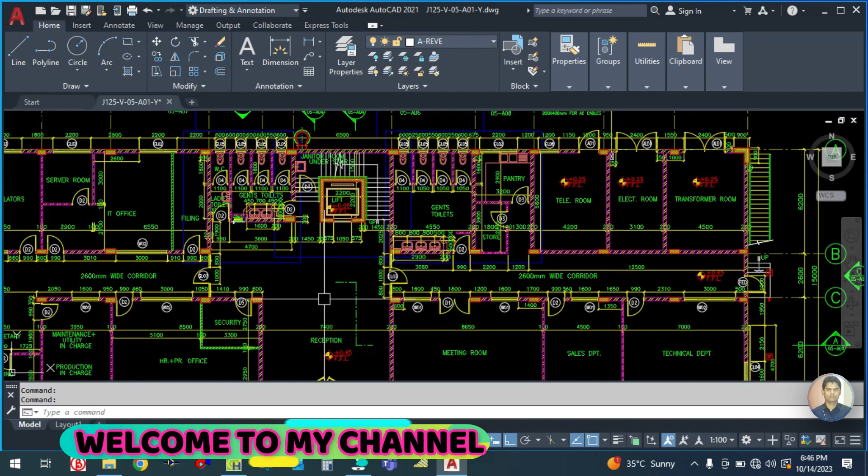So now we are going to start the table split system for ground floor. As you can see here, we have created until this planning and translator as well as toilet. So we are going to continue the remaining spaces here: corridor, then telecom room, electrical room, and pantry, storage, gents toilets. So from one system we have to give in all the spaces. So let us start now.

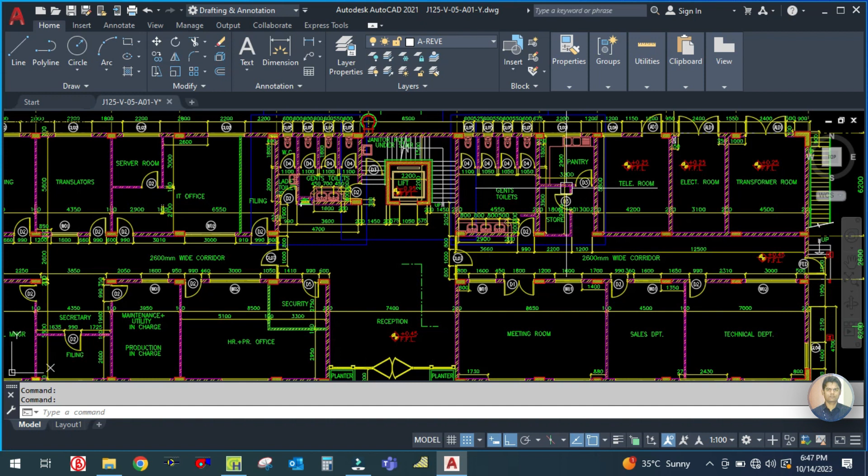Let me create one more system here, which is ground floor corridor. Okay, so we have to create two systems. One is for the corridor and one is for these spaces. So let us start now. Let me create here a system for the corridor. Let me duplicate this. Okay, then

let me check which one is the last space. Here is the split unit 9. So let us duplicate this split unit 9, and just rename this. Here you can see this is the air system properties. So there are four tabs here. First one is the general tab.

Second one is DOAS, dedicated outdoor air system component. This will be applicable for the package unit, that's why this is hidden. And third one is zone component. In the zone component we have to add the spaces into the zone, and fourth one is sizing data. So let us see one by one.

So go to the general tab, and the first one in the general tab is air system name. So let us duplicate this air system name. Make it corridor. Okay, so this is caps lock. Corridor ground floor split unit 10. Okay, and next is equipment type. In the equipment type you have to select the terminal unit, because terminal unit comes under a split unit.

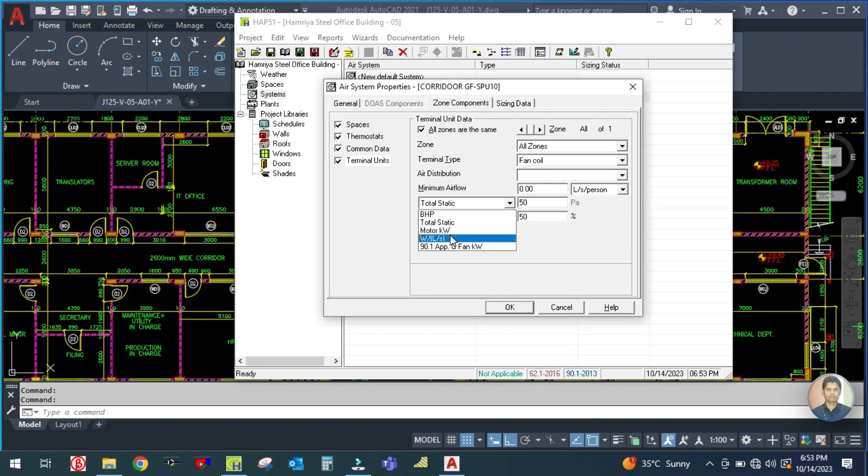zone is all zones, and fan coil unit, this is the fan coil unit, and air distribution. Air distribution, nothing. Here is the total static. Total static is nothing but this. Here you can see the BHP, total static, motor kilowatt, whatever; so many parameters are given here. So first you have to select the total static.

So based on the total static, the system will assume the heat dissipation from the motor. Okay, keep it, this is a small system so keep it. Just assume 50 or 100 Pascal.

Then go to the sizing data. In the sizing data you can see here there are two: this zone sizing data and zone system sizing, and zone sizing. So in the system sizing, if you uncheck this, it is not going. This is automatically selected by the system, checked by the software.

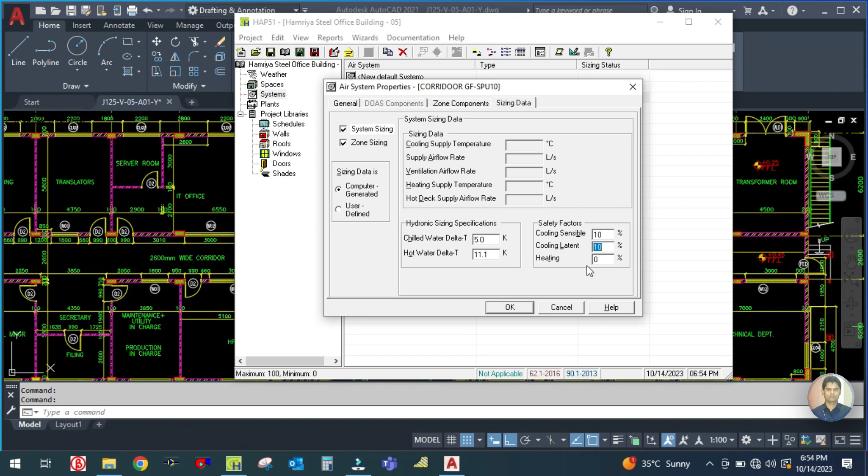So in the system sizing, you can see here the safety factor is given. In the safety factor you should keep cooling sensible 10% and latent 10% as well. And if you are dealing with a heating system, you should keep heating also at 10%. And for a chill water system, if you deal with hydronic sizing specification chill water system, you should keep the chill water in and out delta T, the temperature difference between in and out.

Then go to the zone sizing. In the zone sizing you can see here the zone airflow sizing method is sum of space airflow rate, and the space airflow sizing is individual peak space load. Your zone is corridor, and here is the computer generated data. The sizing data is computer generated.

Do not make it user defined. We need computer generated, so no need, but if you want to change you can select user defined. I want to generate by computer, so let us select this and click OK.

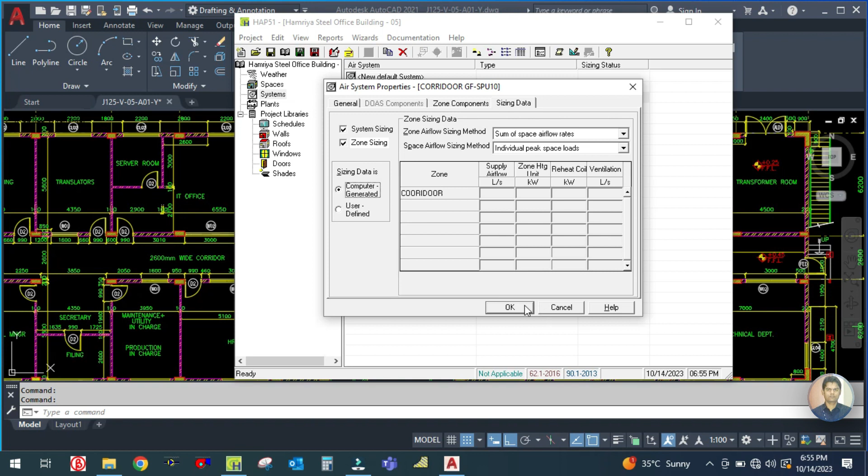So the system for the corridor is created. Let us check the input data first. What I am going to do for the input data is just select this corridor, and here you can see this is the quick access toolbar.

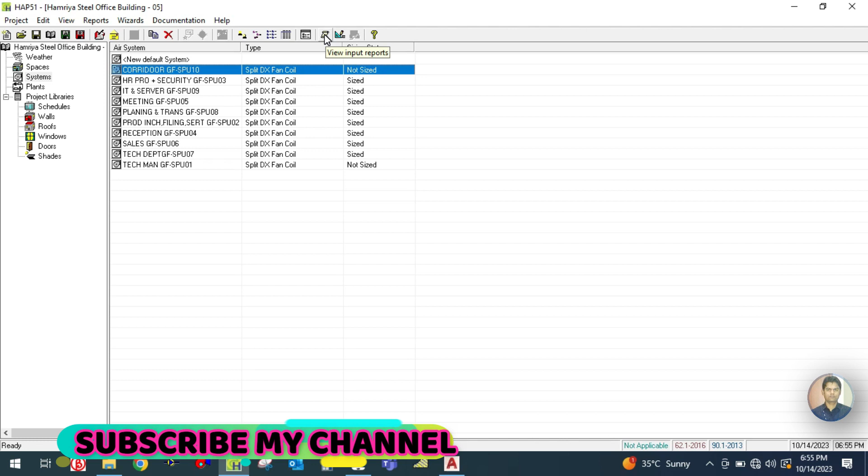In this you can see this icon looks like a taper, taper offset duct. So in this you can just right click, just click here to view the input report. Just click this and the software will generate the input report.

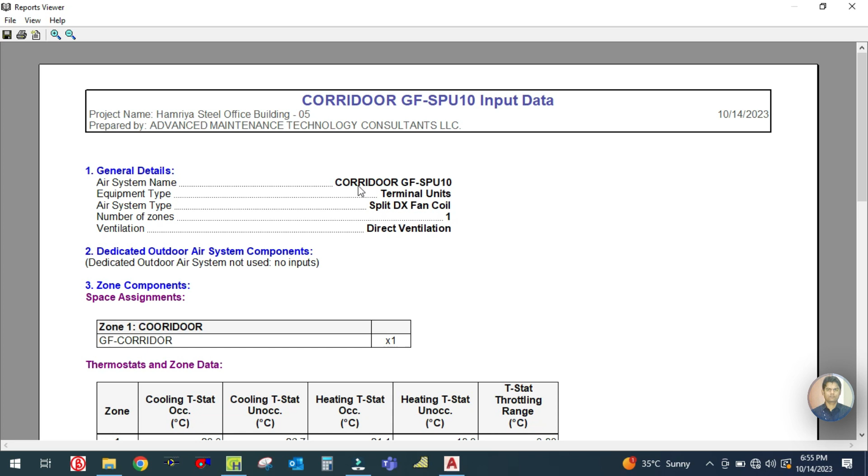So here you can see the corridor ground floor split unit 10 input data, and in the first one there is general details which is about the system. So air system name, equipment type, air system type, number of zones, whatever it is. Ventilation is direct ventilation, and here the dedicated outdoor air system is hidden because we are not dealing with a package unit.

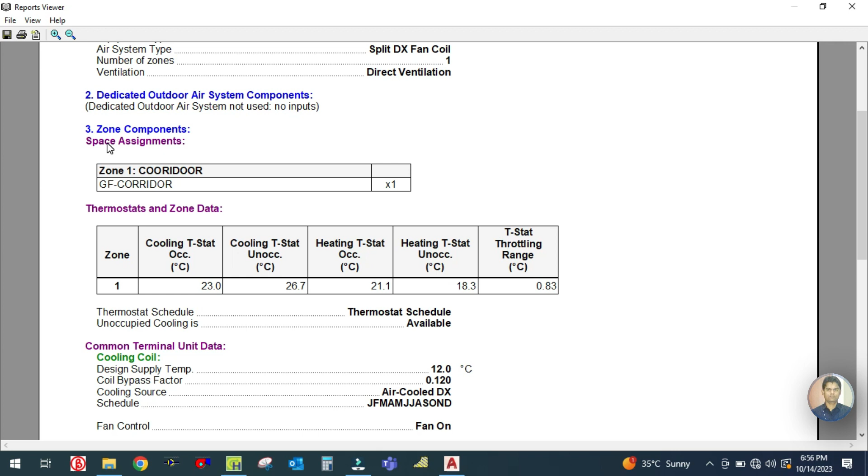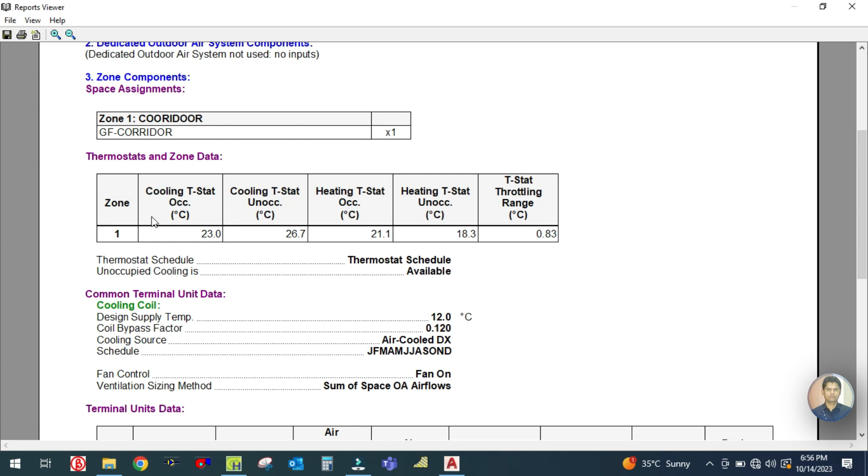Third one is zone component. So in the zone component there is a space. In zone one is the corridor, which is ground floor. Okay, and here this table is about thermostat reading, set point. And the next is the cooling coil data.

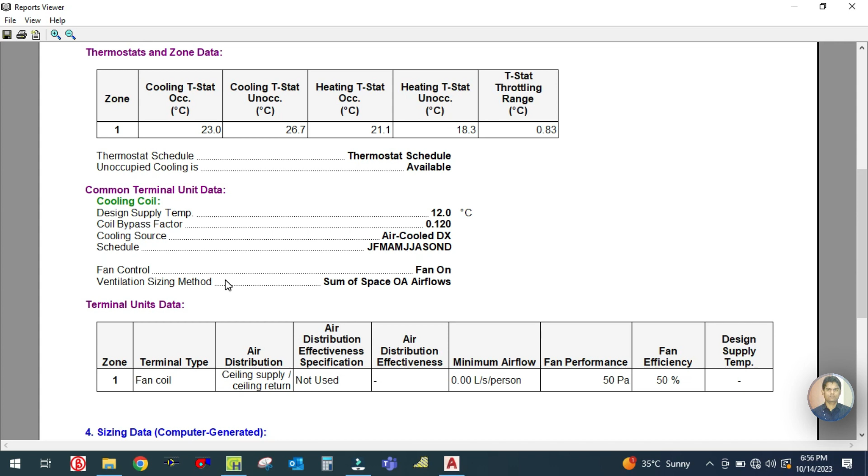In the cooling coil data you can see here the design supply temperature which is 12 degrees, coil bypass factor 0.12, and cooling source is air cooled DX. Schedule is from January to December. Next here you can see the sizing data. In the sizing data there will be the safety factor, sensible and latent, what we entered. So this is the input report.

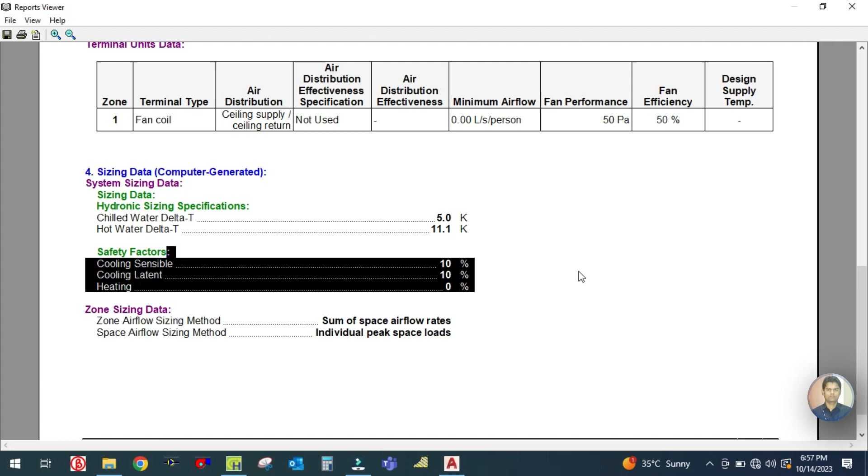How to generate the output report? I will show you. Just select this, and you can generate it. You can just right click, and you can see here view design, print view design result. You can view from here also.

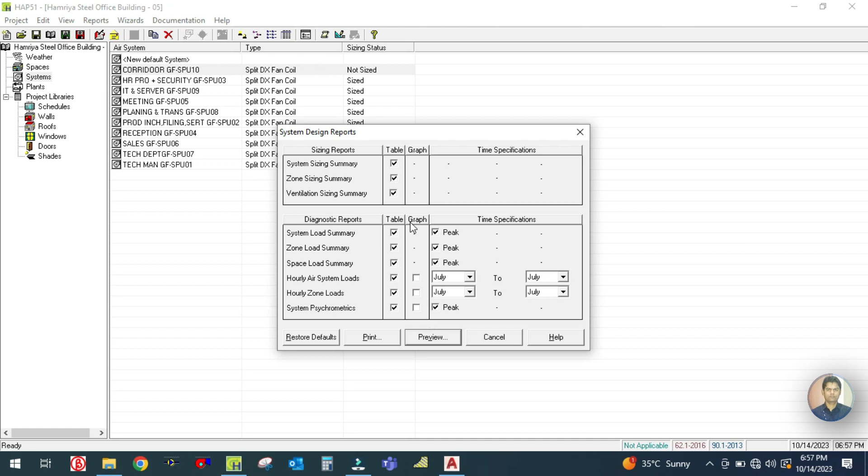Just click there, and you can check all the system sizing summary, zone sizing summary, ventilation sizing summary. These three should be checked, and for whatever result or report you want, you just select it. Let me select all of this first, and then click on preview. So your software will generate the output report.

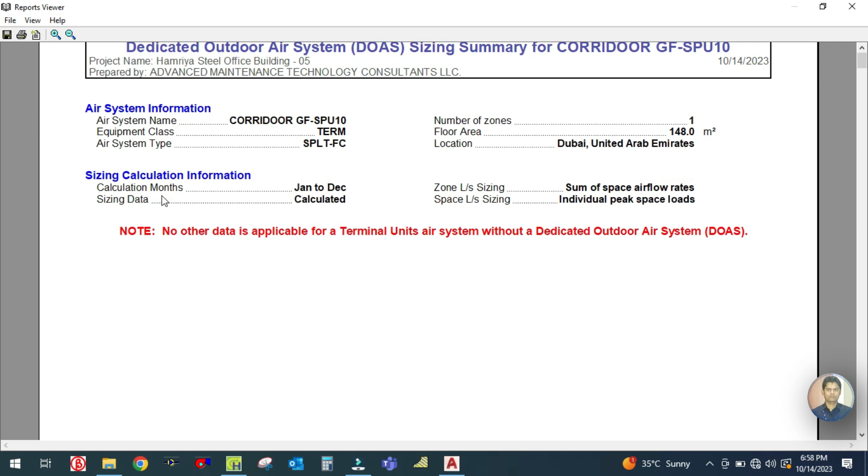So you can see here, this is your output report. In the output report you can see the first one is air system information, then sizing calculation information from January to December, and sizing data is calculated. Number of zones is 1, floor area is given here as 148 square meters, and location, then zone sizing, space sizing, all data is given here.

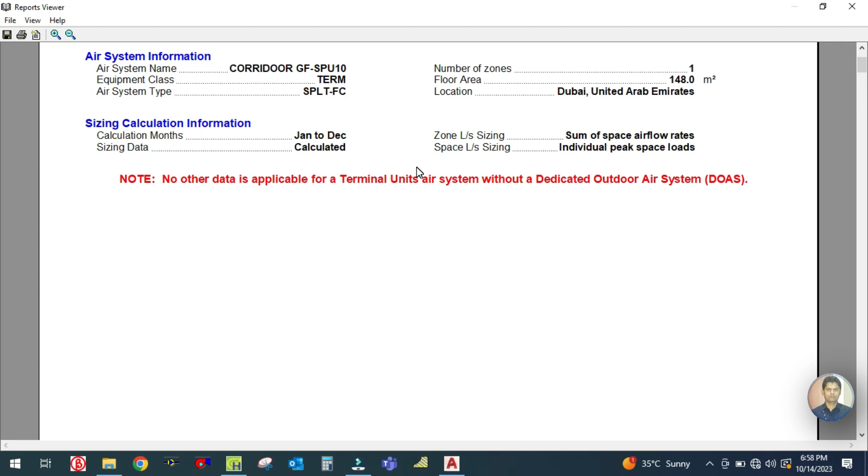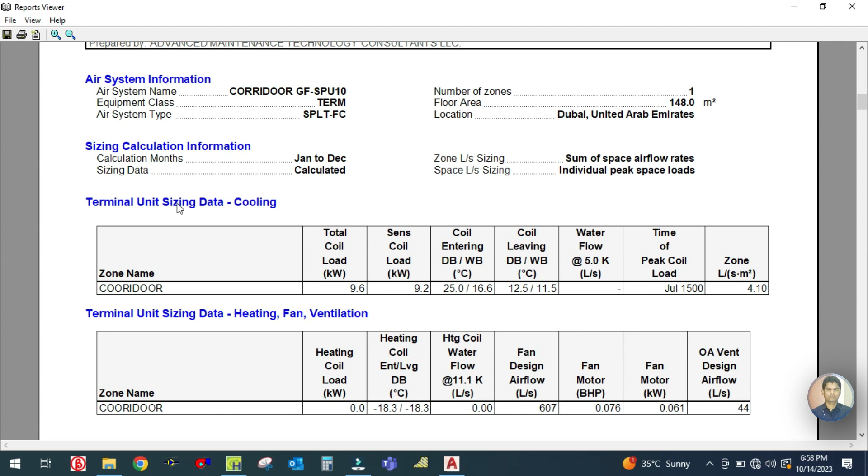In the second page, you can see this is the zone sizing summary. So again here you can find the first one is terminal unit sizing data, cooling.

About cooling here, terminal unit sizing data. So this zone name is corridor, and total coil load is 9.6 kilowatt. Sensible is 9.2 kilowatt.

Cooling entering dry bulb and wet bulb is nothing but the entering air temperature, the return air temperature, and this is the leaving air temperature, which is leaving the coil after touching it. This is the on-coil, and this is the off-coil, we can say. So on-coil temperature is the room temperature, the temperature of the air which is coming from the room.

So 25 degree, and dry bulb wet bulb temperature is 16.6. Leaving temperature is dry bulb and wet bulb - the air which is leaving the coil, at that time the temperature is 12.5, and dry bulb wet bulb is 11.5. And the time of peak load is July, 1500 hours, which is 3 o'clock.

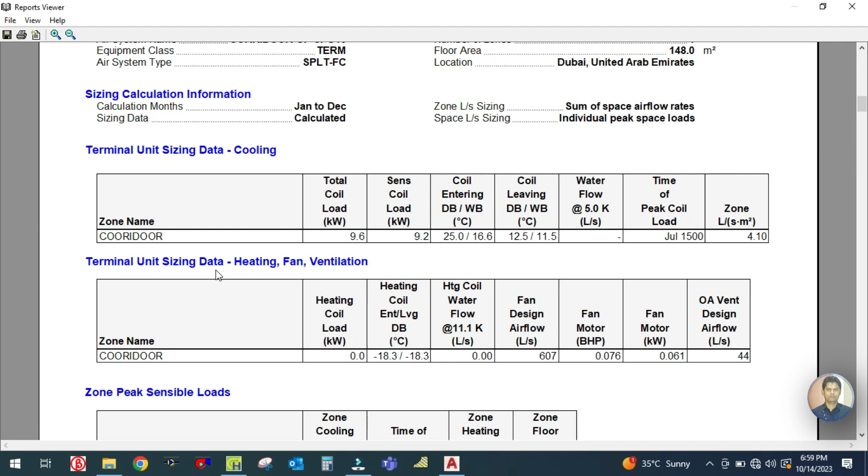And the zone liter per second per square meter is here. This is the terminal unit sizing data for cooling, and this is for the heating. Since we are not dealing with heating, this is 0.

Zone peak sensible load - in the peak sensible load, this is July 15 at the time of 3 p.m., and the peak load zone cooling sensible is 8.1 kilowatt. Peak load is nothing but the sensible load, that time the heat is more, so 8.1 kilowatt is required.

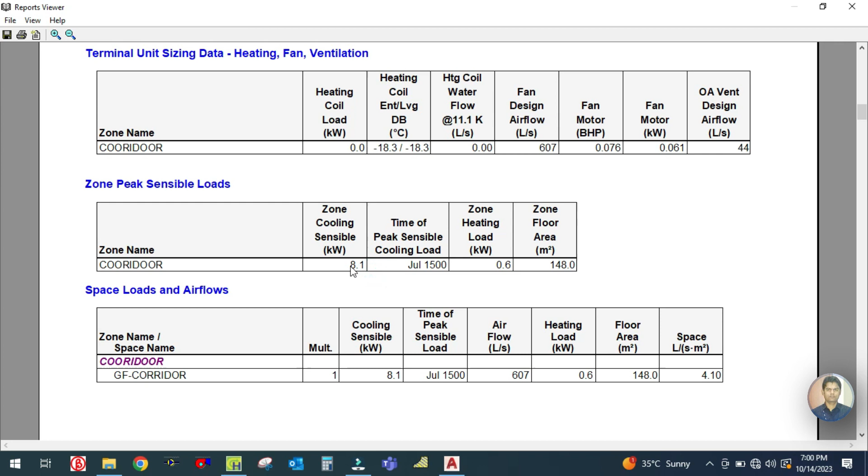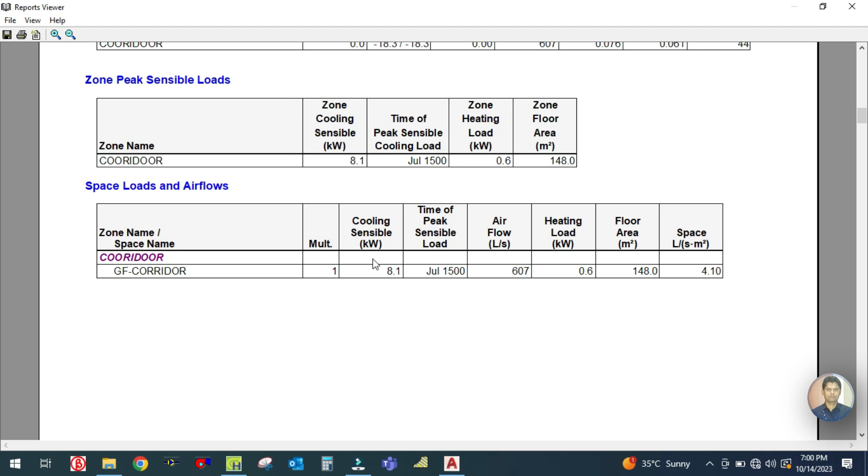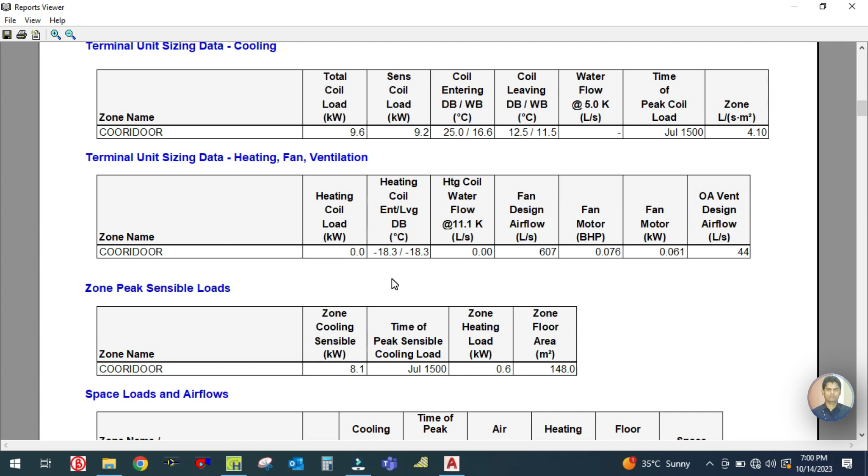And the space load - space load is nothing but the cooling sensible here. Space load corridor sensible is 8.1, and peak time is July 15. Airflow is given here in liter per second, which is 607 liter per second.

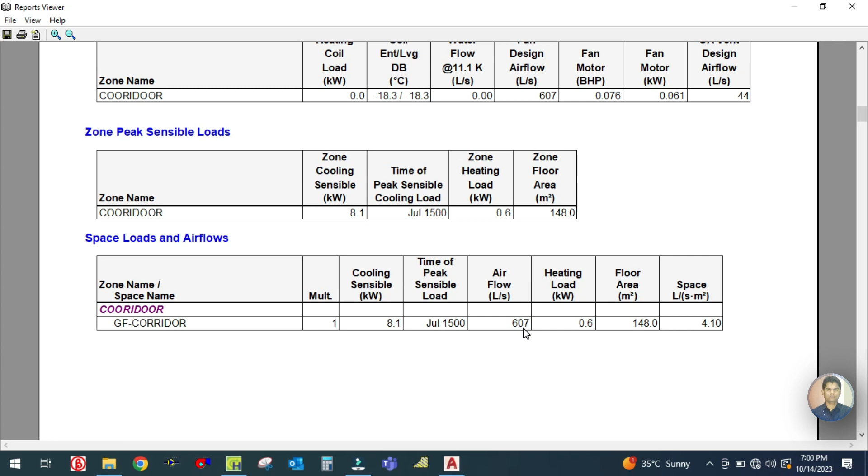Next is your ventilation sizing report. You can see here the summary of ventilation sizing method is sum of space outdoor airflow and space ventilation analysis, which is zone corridor. So this ventilation is for the corridor, and here is two methods.

The total floor area is 148 square meter, and this area is multiplied by area liter per second per square meter required. So this required outdoor air is 0.3 liters per second per square meter. This value is multiplied with this floor area plus...

Number of people - how many occupants are there? Zero occupants. So number of people into liter per second per person - here is the required outdoor air. Liters per second per person is zero.

So this is your outdoor air requirement, 44.4. If you multiply this total floor area into 0.3, you will get this value. Let me show you how it comes: 148 square meter into 0.3, so I am getting here 44.4, which is same here.

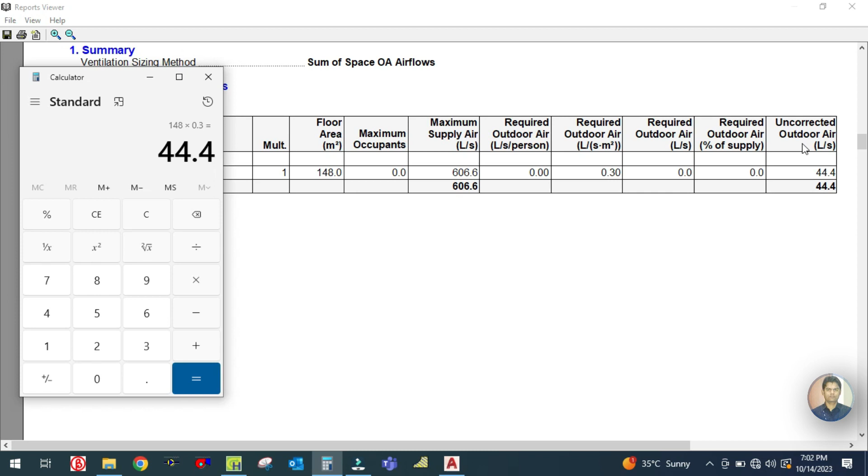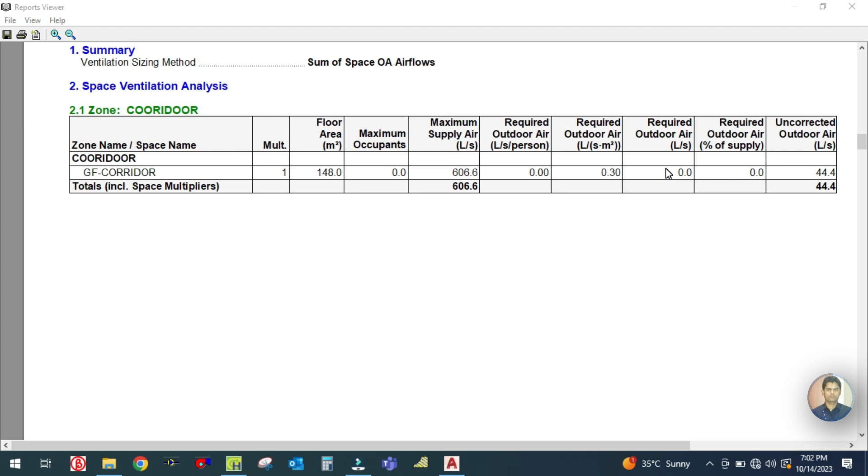This is outdoor air liter per second. If there are people in this corridor, people is multiplied with liter per second per person. If you add these two values, you will get this value. And this is your...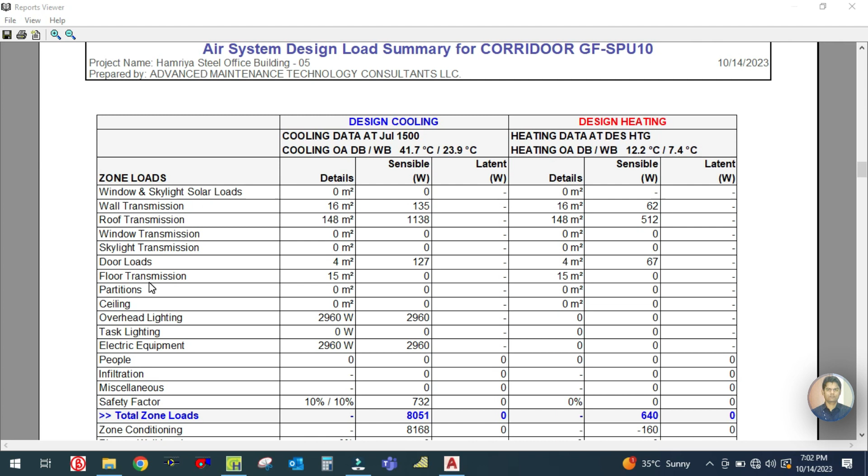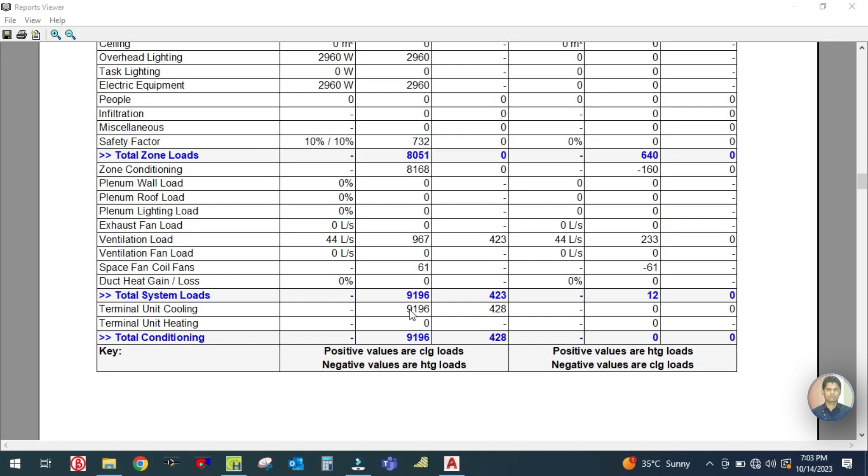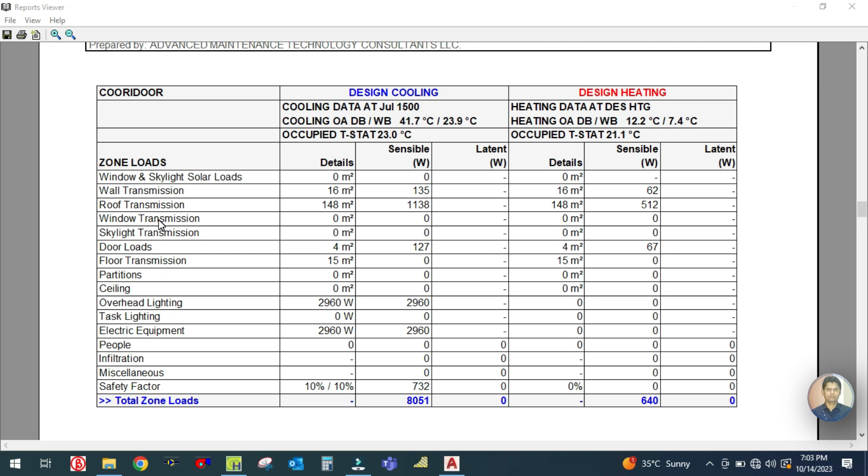And next is your zone design load summary, and this is your space air system design load summary. This is zone load - in the zone load, whatever latent, radiation and load is there, and this is the space design load summary data, which is transmission and radiation load.

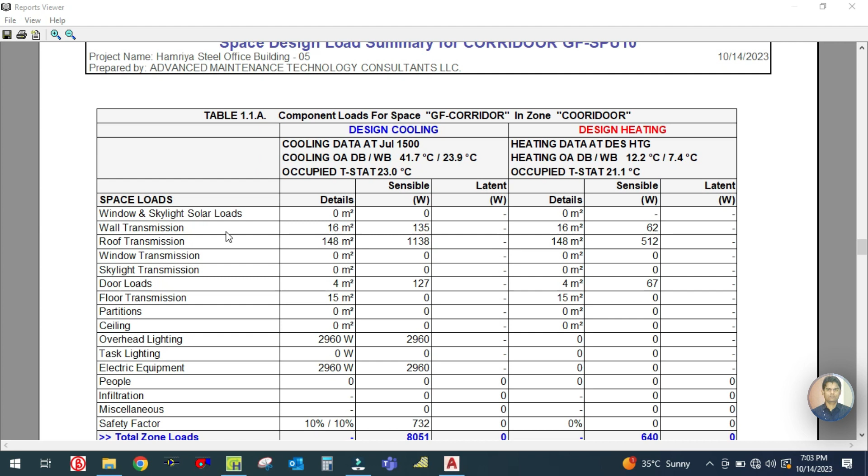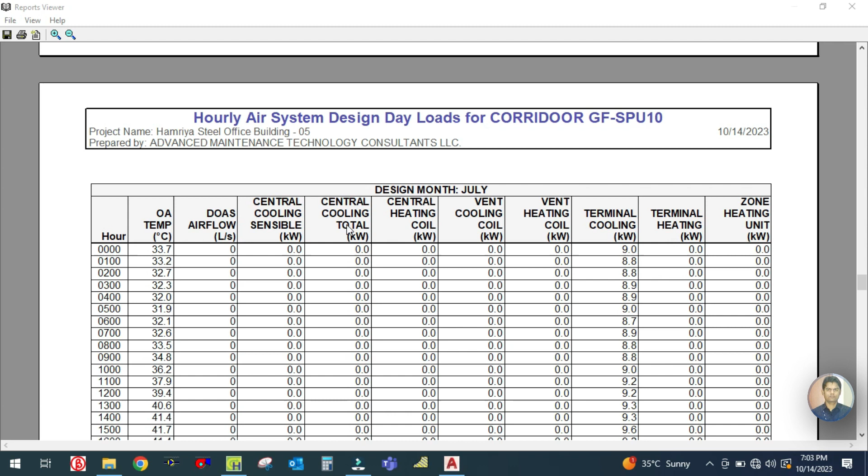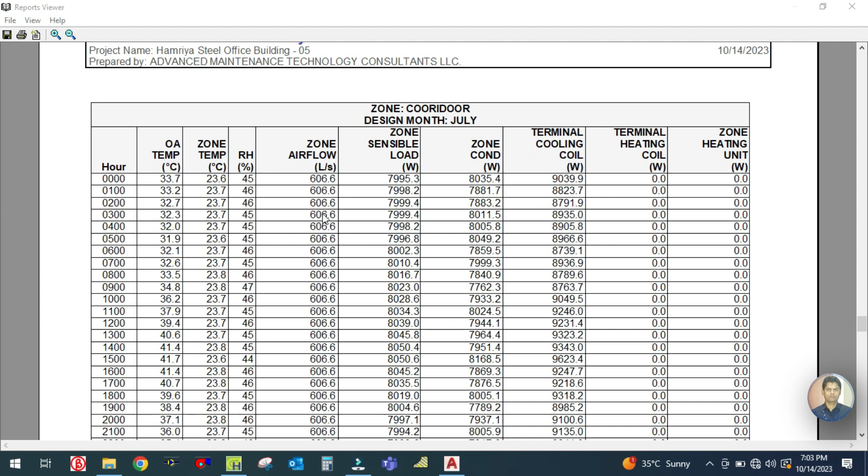And next is your hourly analysis, hourly air system design day load for the corridor. So each hour's load in the corridor is shown in this report, which you can see here. The zone corridor is designed for the month of July, so July is your peak load month. You can see here the total maximum temperature in July is...

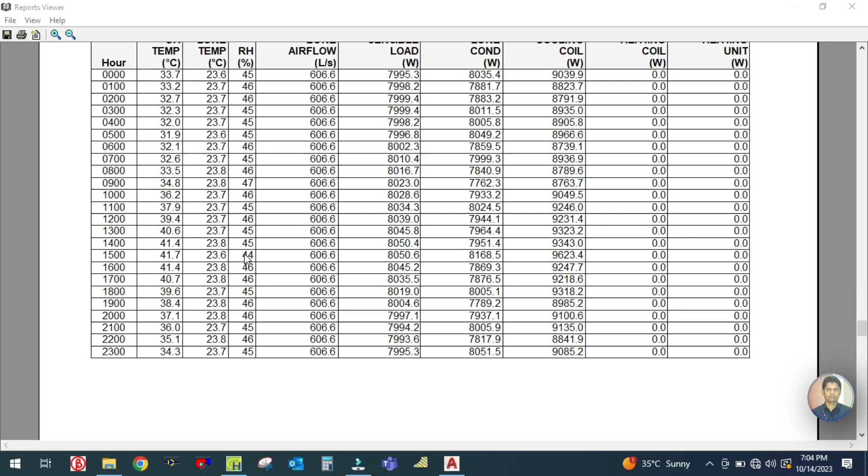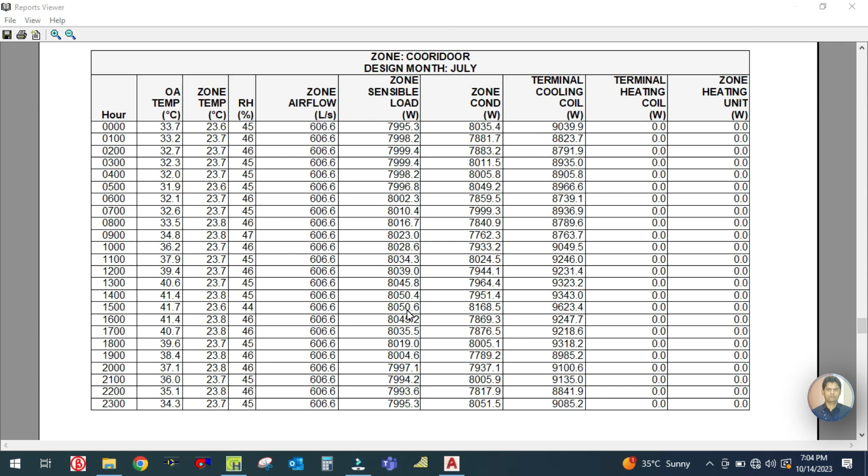41.7, and RH is 44. So that time the flow required is this much, and total load sensible zone load is this much of watt - 8050 watts, which is 8.05 kilowatt. This is your hourly analysis data.

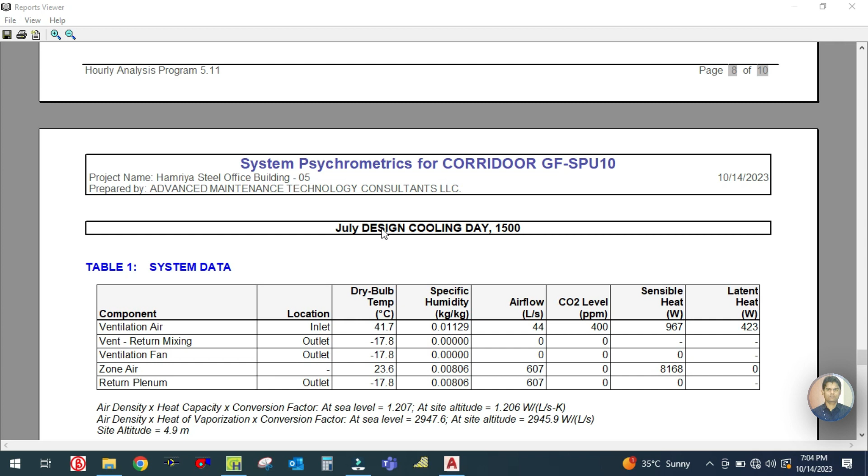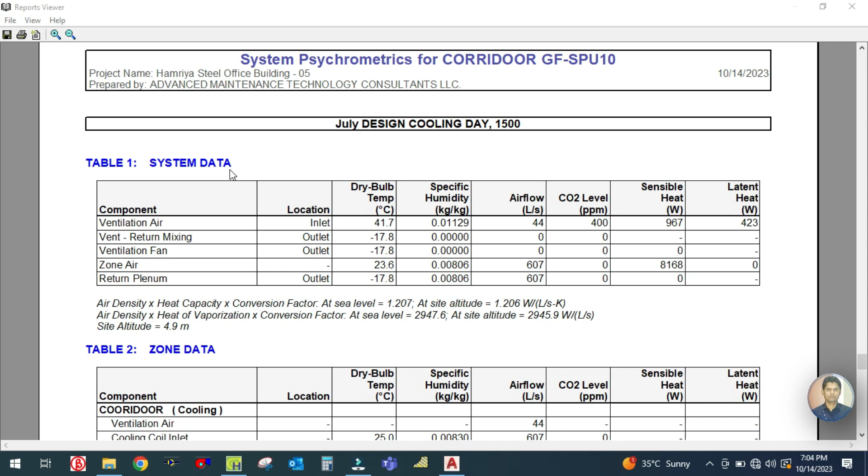Next is your system psychrometric for corridor, for the July design, for July, 1500. So you can see here the system data - system data is nothing but here is your component. In the component: ventilation, ventilation return mixing, ventilation fan, zone, plenum, return plenum, whatever it is. It's showing here.

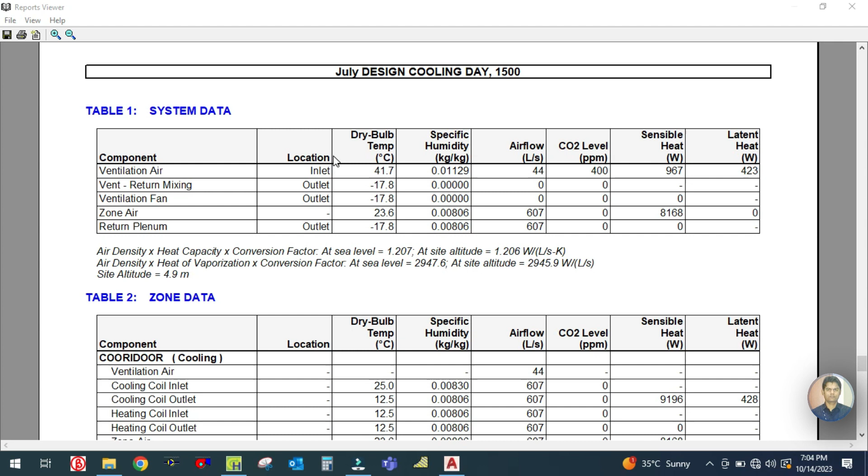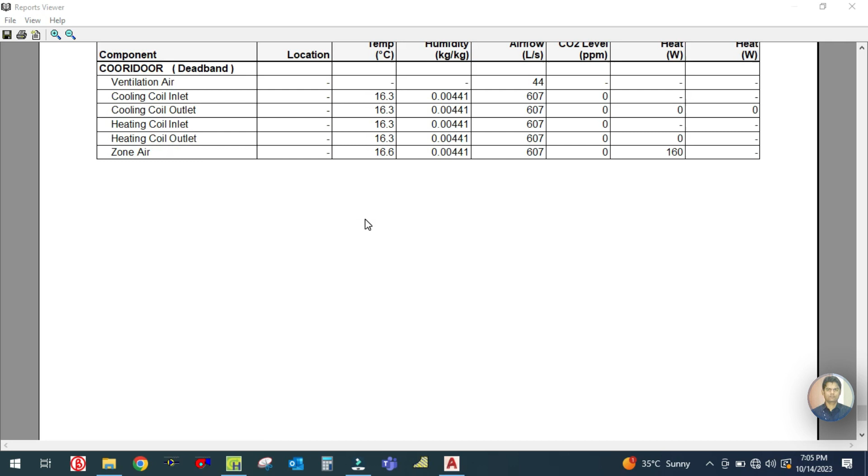And this is your zone data, and the next is for the winter. So this is how the output report looks like, and this is how to read and how to generate the output report.